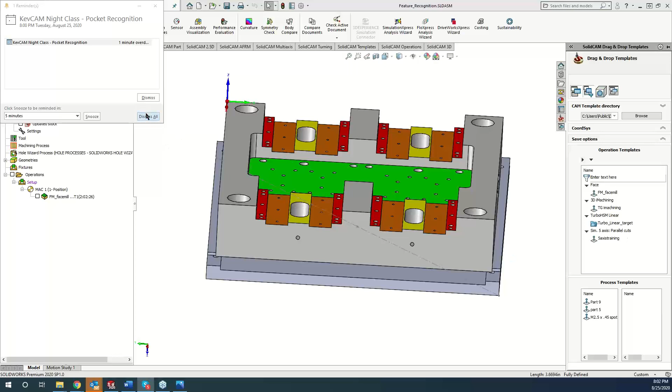But with that being said, we'll get the ball rolling tonight with pocket recognition. Pocket recognition is extremely useful and can be overlooked from time to time, but it's very powerful in what it can do.

Basically, it will look at your entire part, and as long as it sees pockets or open pockets like we're looking at right here, it will go through and it's basically hitting the easy button for machining. So to find that, you can go to your SolidCAM 2.5D tab and click on pocket recognition.

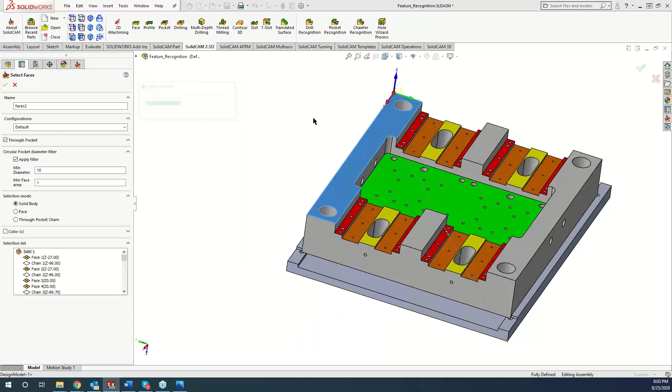Basically it's all based off of your model. So in here, if I go to grab new geometry, all I really need to do is click on the model, and you can see it's going through and parsing out the model right now. What it's doing is going through and finding every single possible pocket that there is.

So right now you can see, let's get a straight-down shot here, it's doing all these surfaces that are pink, as well as these holes, and these smaller holes. Well, in there we can actually sort it out.

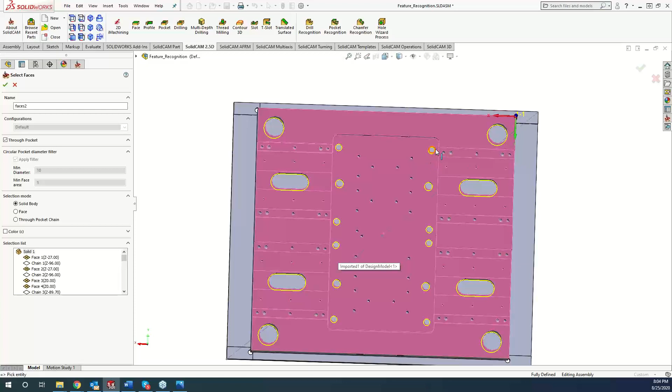Obviously, for doing these drill holes, it's probably not the ideal thing, so we can filter those out. Let me go through and unselect all this here. And now what I can do is tell it I want to apply a minimum diameter filter.

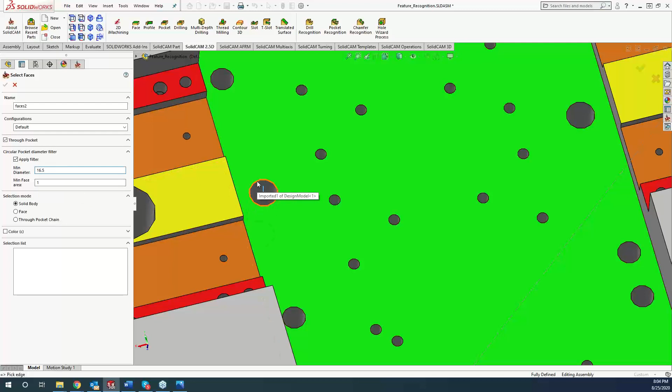So right now it's set, and sorry everyone, this is in metric. I can tell it I do not want it to do anything below 16.5. If you see how I did that, all I did was get my cursor in here and click on this diameter, and it will auto-populate for us.

So now, if we go through, it should not pick up those holes for us anymore. So now you can see all those holes that were in there are no longer there.

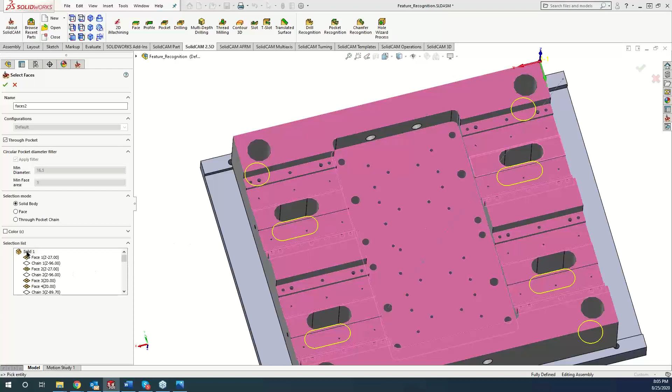Now you guys can also come through into your selection list right here, and cherry pick stuff out that maybe you don't want in there. As I click on it, you'll see that it's highlighted in yellow, and it's kind of tough on this one, but there we go, we can get a side view so you can see which one it is.

Another cool way of going about selecting your pockets is by colors. So you can see on this part right here, I can do it by color region. Let's just start fresh here.

So what I want to do is hit the color checkbox. Now I can do pick from model, and maybe I want to do all the orange faces. So I can click on the orange faces, and you can see that... Greg, what are these called? Pigment colors?

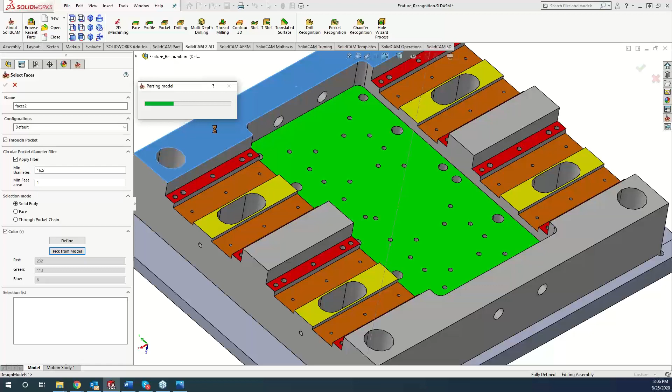So once I have those colors in there, I can click on the model, and what it's going to do is it's only going to look at those faces that are relative to those colors. So now you can see it has picked up all those orange faces. I can do this with any color, whether I'm looking for the green or the yellow. That's another way of going through and filtering out everything through the field there.

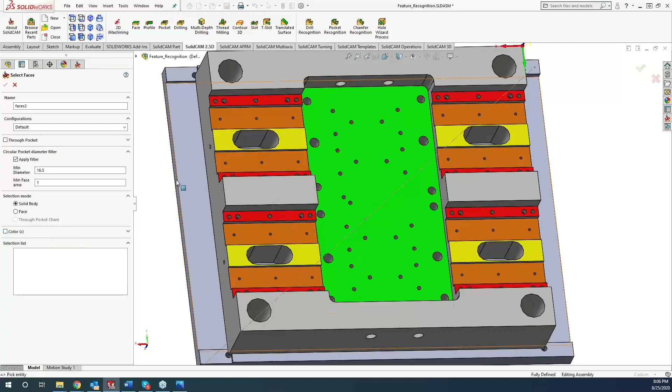So let's go ahead and unselect this. Now, maybe I want to do the entire part, but I don't want it to do any of the holes or through pockets. So what I can do is come over here, uncheck the through pockets, and turn off the color, and I can do it by solid body or faces. Click on there, and now we're filtering out those small holes as well as any through pockets.

So it's a real nice feature. If you have a part that has a lot of pockets along with a lot of holes, this is a great way to go through and machine out your part.

So now I'm happy with what we got. We're going to be machining off our entire face there. So I can go ahead and hit the green check mark there.

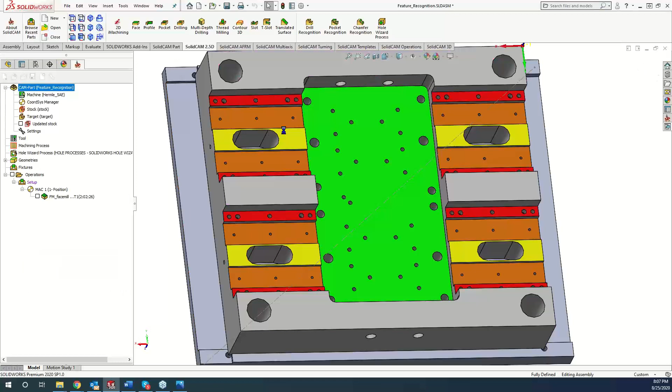And now I can come in, oh, let me just go a little bit deeper in here. If I want to edit that geometry, I can click the modify button, and maybe I want to divide it by steps. Do I want to ignore floor fillets? I can do fillet by one profile cut.

Exclude the top face. So if we're machining up that top face, maybe I just want to do it with a face mill versus a pocketing operation. You do have the option right there.

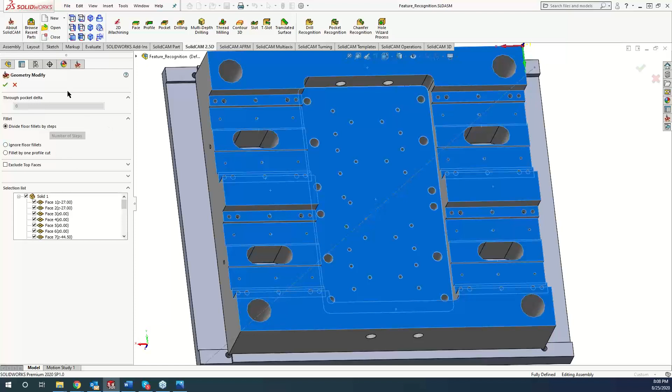Now you'll see right here, my through pocket is grayed out, and we'll come back to that with the through pocket ones shortly here. So now I have my geometry that was basically automatically picked. Any modifications I want to make to that.

I can also turn on my fixture protection. So if we are going to be going through the part into a fixture, I can tell it to go down up to a certain distance. We can also do rest machining in there.

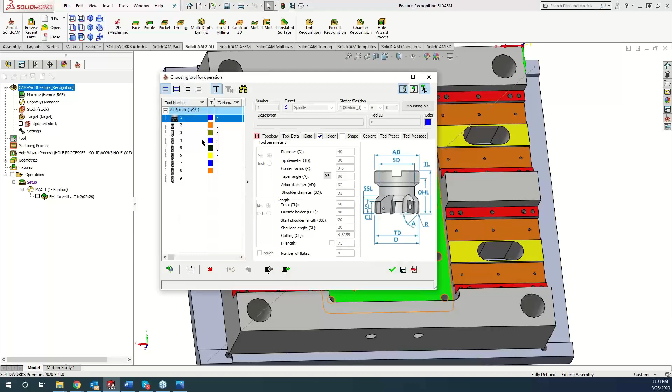Now, grabbing our tool. What do we have in here? We got a 20, that will work. And our levels. So right here is basically like a pocketing operation.

Upper level, now it's automatically going to pick the lowest spot on there. If you want to override that, you can just hit the little checkbox and that will override that. But since it's all based off of the pocket faces, it's going to find out the deepest spot.

Now, if I want, I can do step downs right here. So right now we're telling it to do 10 millimeter step downs. A lot of times I get the question asked, what is the adaptive step down? So basically, let's see, this wall is 5 millimeters.

So right now, as it sits, if we come in here and pocket this out, we're telling it that we want to do a max step down of 10, but sometimes it may be 11 thou, and there might be that 1 thou left over. If we turn on the adaptive step down, it will automatically insert additional steps in there to get that floor cleaned up for you.

So we can definitely turn that on. Like I said, it's basically looking at how much do you want to take per pass.

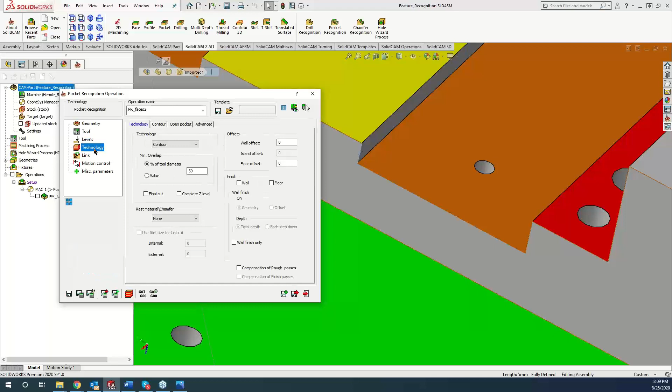If we go to technology, kind of like what we covered a few weeks ago, looking at just a pocket operation, it's the exact same screen as what we've seen before. So do we want to do a contour? Do we want to do a hatch? Do we want to do a hatch with a finish?

As well as how much do we want as overlap? So we can do percentage of tool. Right now we're telling it 50% of the tool, or you can set it up as a physical number in there. Are we doing rest machining?

Do we want to leave material on the wall and the floor to do a finish pass? If we are leaving material on there, do we want to do that finish right here? We do have the option just to finish the walls only. So maybe on this particular part, let's say we have a high tolerance for all these walls right here.

So what we can do is come in here and do a 5 thou wall offset. What I want to do is use this tool as a rougher, and then come back with a finishing tool and clean that up. So I'll show you guys how to do that also.

Inner contour, do we want to start from the inside or do we want to start from the outside? Corners, we can turn on our corners like we did in the pocket. If we can put a fillet in there, we can do loops as well as doing sharp. Do we want to climb cut, conventional cut, and then a couple other options right here.

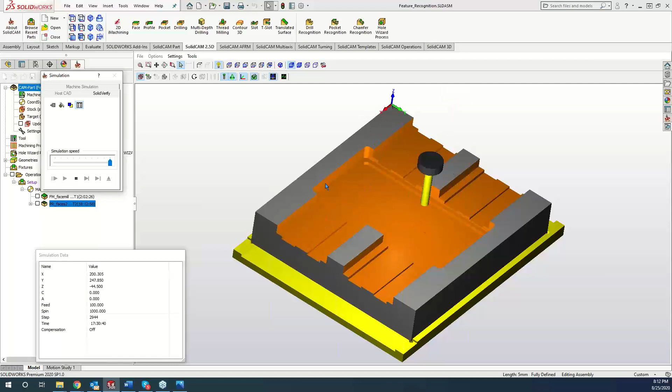Let's go ahead and simulate this through. So you can see, it starts from the center and works its way out. We'll try to get this to play through for you guys as fast as possible here. And now we go in there, we are good to go. So nothing needs to be cleaned up in there.

Actually, no, we should have - if we go back to my technology, we should have a wall offset. Oh, I forgot this is a metric part. We'll do a wall offset of 1 millimeter. Save and calculate, simulate this now.

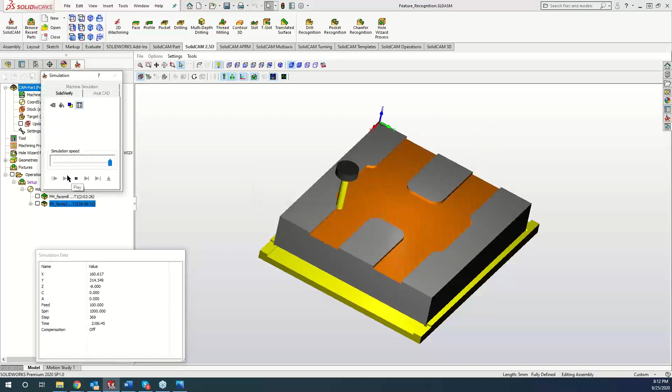There we go. And we can do our stock target comparison. And now we can see that we still have that material on the wall to finish up in there. So easy enough, I'll hop out of here. And I'm happy with the way this looks. So like I said, I want to use a different tool to finish up those walls for that good surface finish. So we still have that 1 millimeter there.

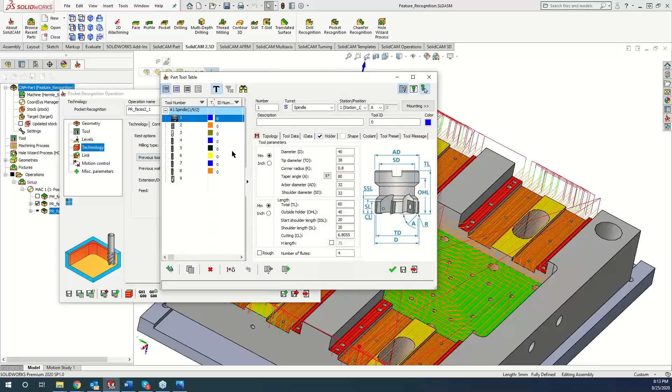So what I can do is do save and copy. And I can tell it that I want to finish the wall, and we'll put a 0 in there. I want to finish the wall only, and I can also turn on my rest material. Previous tool diameter is R20.

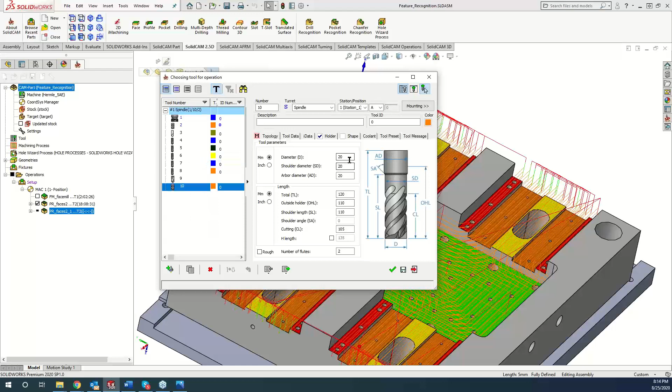And I'm just going to come in here and still use that same end mill - even though I would swap it out normally. So let's go to tool, select. Guess I'll have to make a copy here. Copy that tool, and we'll just say it's a 10 millimeter.

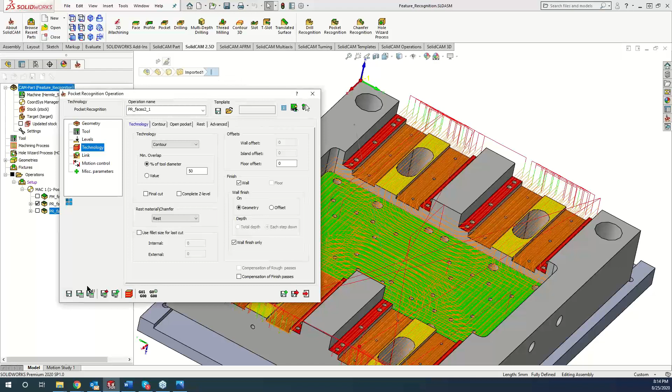It's not liking something I'm doing in here. There we go. Nope, still not liking anything in here.

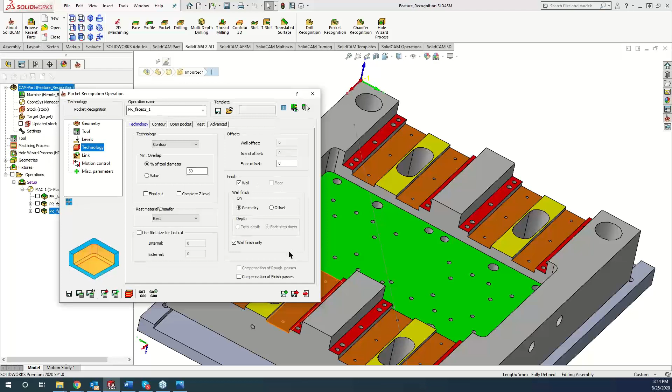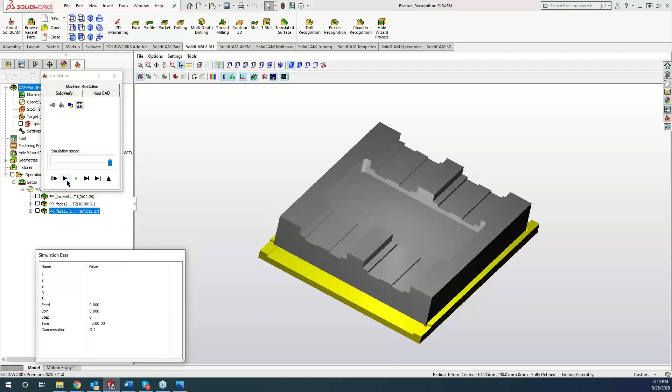I want to finish the wall only here. There we go. So technically there's no rest material there, because the end mill I was using was a 20 millimeter and we have a 10 millimeter radius. So I was trying to tell it to clean up material that was already gone. But now, if I'm looking for that really good finish in here, I told it just to finish the walls with that tool, doing that same step down. And it's not recutting any of the previous material, so all it's focusing on is cleaning up those walls. So now if I come in here, we can see that we have all the material gone from all these walls right here. Okay.

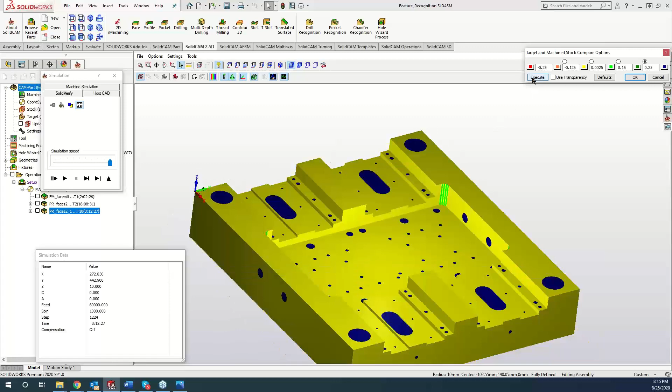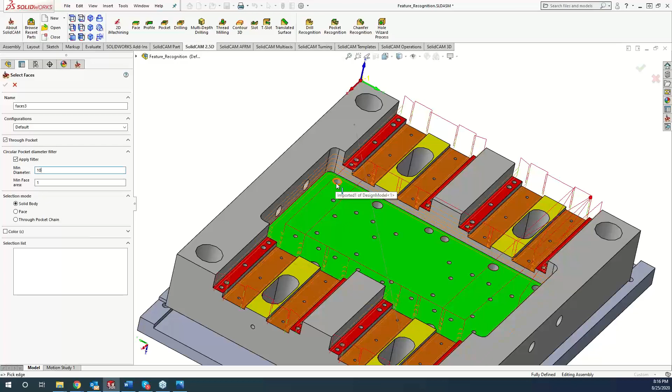Now, like what I was telling you guys before, with those through holes in here - let's go ahead and grab new geometry here. I'm gonna tell it to grab the through pockets this time. And oh, I forgot to filter. Darn it, sorry guys, unselect all. I forgot to filter out my hole here. This one, I thought was 13.5.

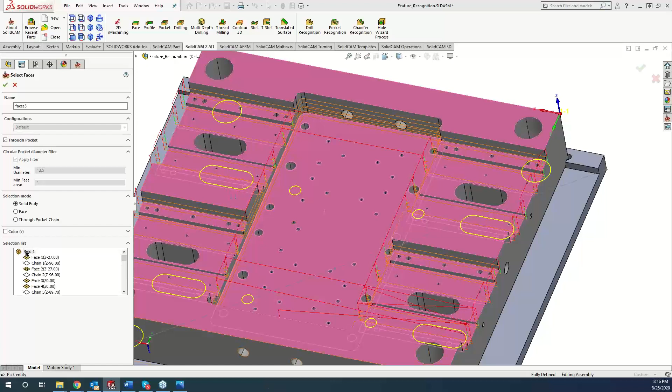Nope, looks like that's it. Going through and looking at the entire part file here. Oh, still got my holes in there, grabbed the wrong one. Sorry guys, I keep grabbing the wrong chain here. I'm gonna filter out this one. There we go. All right, now we have everything that we're looking for there, as well as our through pockets.

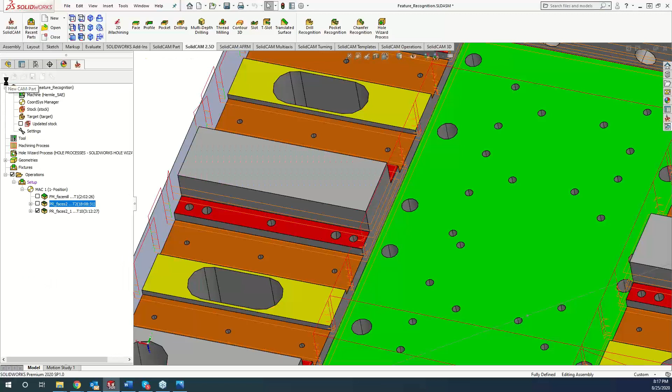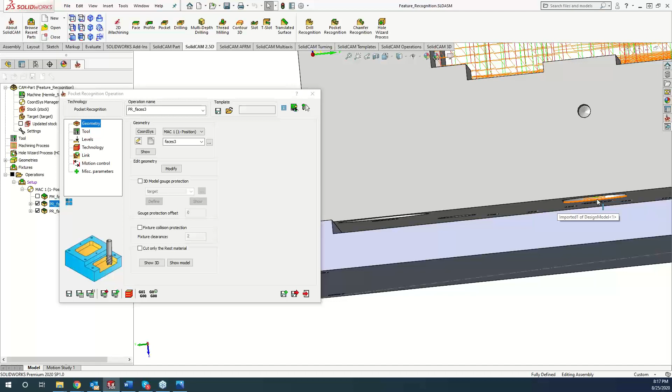Now, the one thing I want to show here is if I do save and calculate on this - zoom out here and we'll get it rotated around. If I go underneath my fixture, I can see that that toolpath is going right down to the bottom here, but it's not going past. So if I want, I can tell the operation that - hang on one second here.

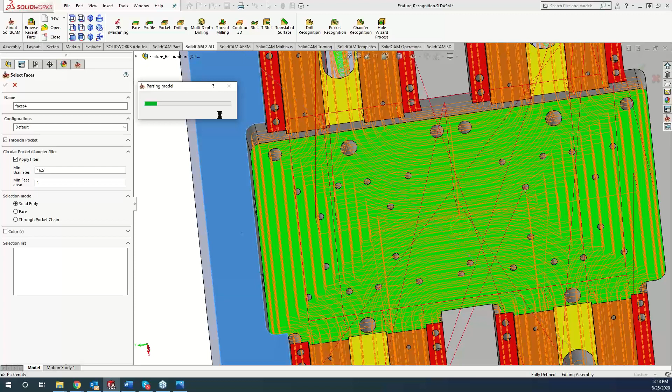Something is - we're having a SolidCAM failure going on here. Got our part. Okay, got our through pockets. Now, go to modify.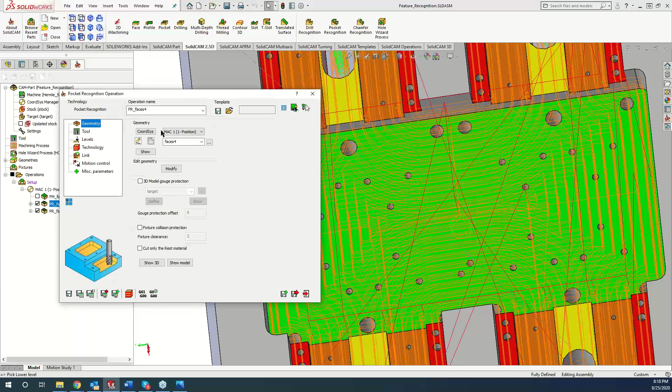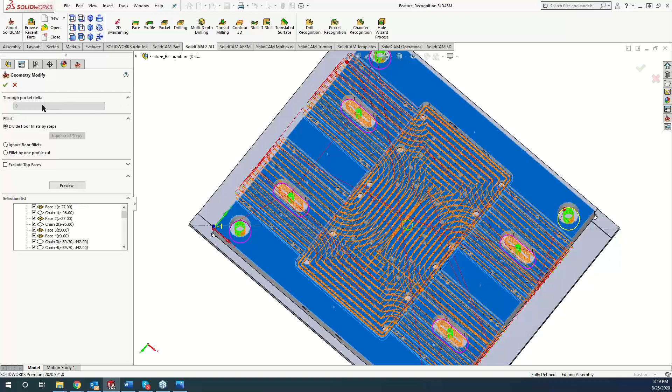Okay, I just did this right before we started the class. The through pocket, we should be able to come in here and type a negative or additional delta on those through pockets. So we can come in there and not do an additional across there. But I'll show you guys that in the next part too.

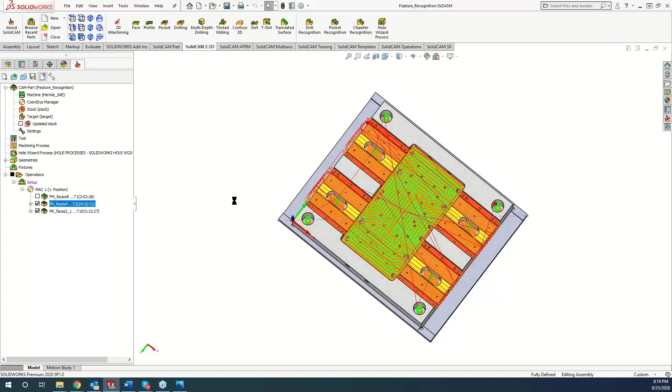But okay, any questions on this part file right here or on pocket recognition so far? Okay, I don't see anything coming through here. So let's hop out of this part file and go to our next one here.

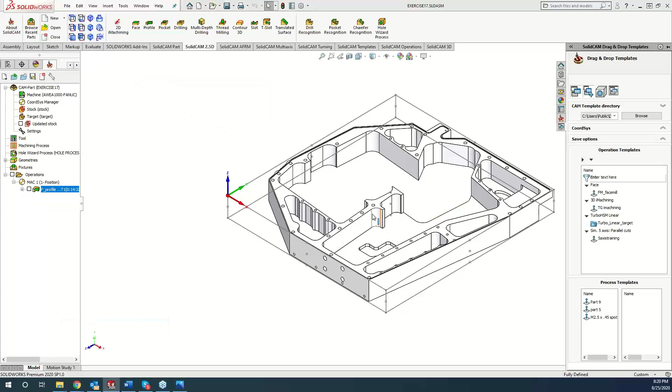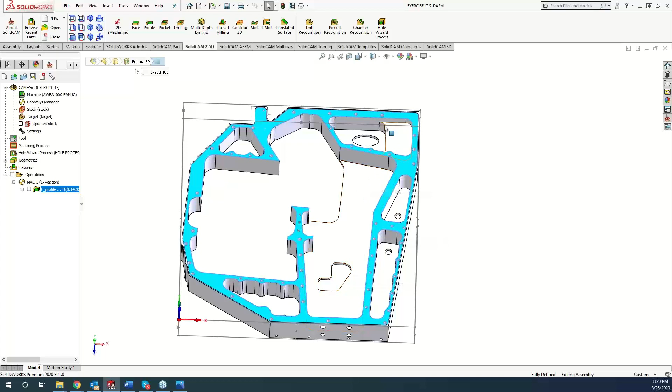Now, one thing I did forget to mention with pocket recognition is it does not matter on the depths. So all that other part, all those were at different depths. Same thing with this one, we have this space right here that is higher than this space. These are all different, plus we have through pocket, plus we also have this entire top right here. So this can be done in pocketing as well, but it definitely takes a lot more chaining to do that, where what it can do is come in here and tell it I want to pocket out everything using my cutter.

So we can go ahead and do our pocket recognition again. Grab our geometry. And I want to filter out that hole right there, which is 12.7 millimeters. So basically I'm telling it that anything that is 12.7 millimeters or smaller, it will not pick up. So it's going through the model and finding all the pocketing.

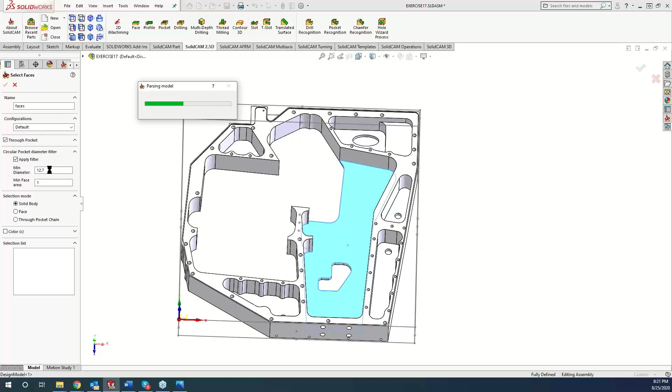Okay, so now you guys can see everything in there, but the one thing is with the open pockets, if it's over a certain size, it's not going to grab it. So what I can do is come over now and do the through pocket chain, and I can chain that pocket, and so it will grab it for us right there. So if the open pocket, or the through pocket, is larger - I don't know the exact number - but if it does not grab it, you can definitely come through and do that through pocket chain just like it is right there. Okay, so we're happy with that. We'll go ahead and accept that.

And now I can go into my Geometry Modify. And like I said, with those through pockets, I would like to go an additional maybe 5 millimeters, do a negative 5 millimeters past. So now you can see I got the minus sign with the arrow going down. So we're telling it to do an additional 5 millimeters past on those through pockets.

And my computer's slowing on me here. Jacob, you're bad luck to have you in here. Usually it goes through nice and smooth. That's definitely, we can definitely blame me. It's definitely my shoddy internet down here in Kansas.

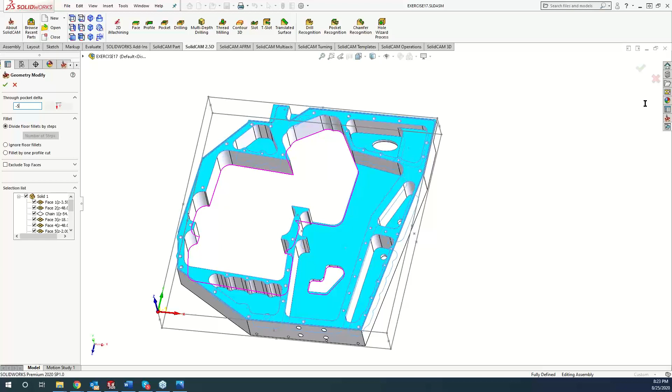All right, so come on here. What I'm going to do is just reselect this here. So we want to filter out that hole diameter. Click on our model.

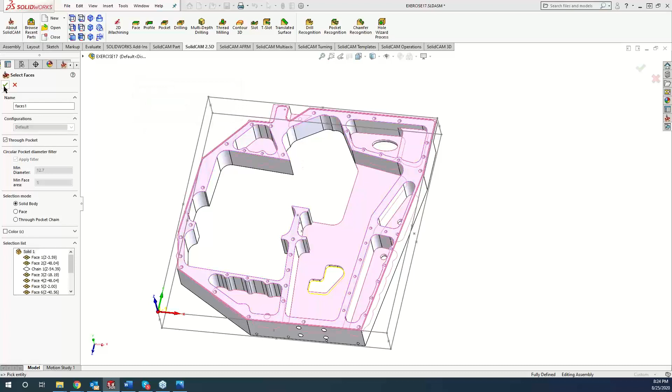All right, and then we got to grab that through pocket chain again.

Now, to Jacob's point, regardless of color blindness, there's always the pick from model feature as well. So if there's something showing up that you don't recognize as a particular color, you can click on that model face using the define feature, and it will grab those values for you and select everything that's within that color.

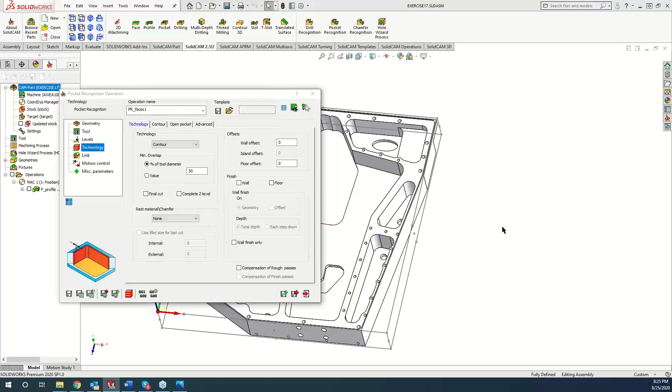Absolutely. All right, so kind of the same thing as before, we are going to do rough and finish it all out with what we have right here. We can turn on our wall finish, but since we already have a wall offset of 0, we don't need to, but maybe on that last pass we'd just like it to take maybe 5 thou. So right now what I'm telling it is it's going to leave 5 thou on the wall to do a finish pass to clean up that 5 thou that's left over.

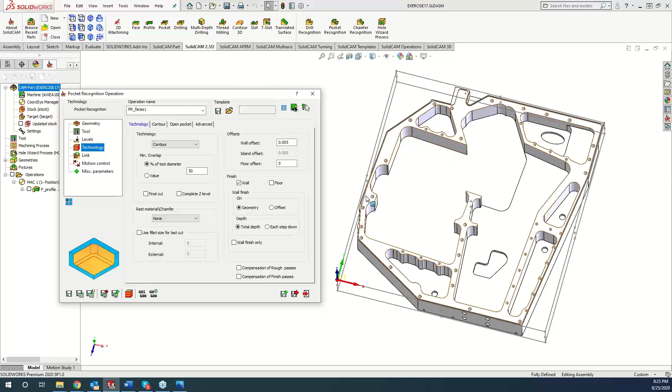And we can turn on our compensation for our rough passes as well as our finish passes if you guys would like that. So we can save and calculate here, and let's go ahead and see what we have. We'll go ahead and go to our SolidVerify here.

So there's that real thin top layer that was in there. And now, like I said, we are doing those 10 millimeter step downs in there.

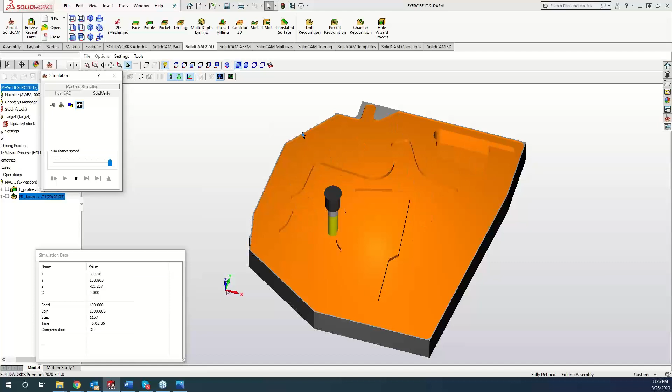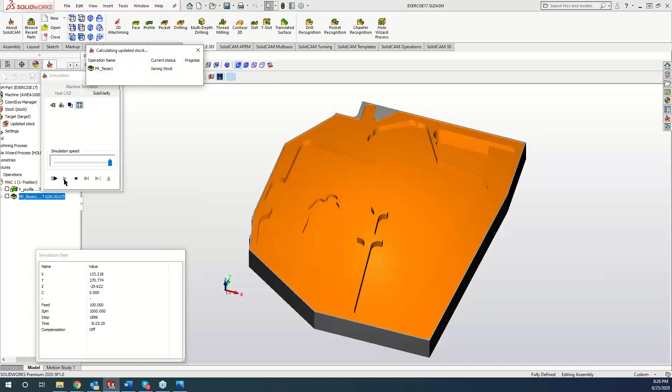And if you guys are having a lot of these pockets, and you can kind of see right now the simulation speed's going a little bit slow, what you guys can do is come into your accuracy and change that. So if I made it 0.01 millimeters versus, let me pause this and reload it again, now you can see it's doing it much faster if I loosen up that accuracy. Now that accuracy does not have anything to do with the way your G code is or the way it's going to be on the machine, it is just visual only for what you guys are seeing in here.

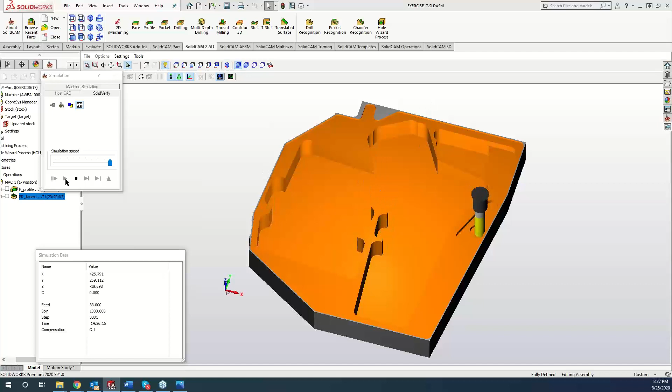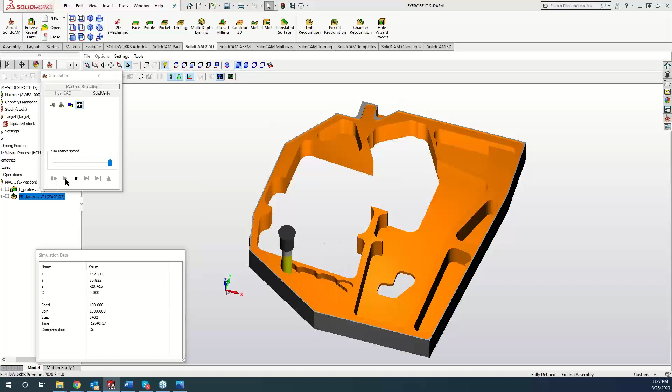Getting those side pockets there. So you can see how much toolpath is actually in here just by doing that one operation. So like I said, if you guys have a part that has a lot of pockets, this is a very helpful feature to do.

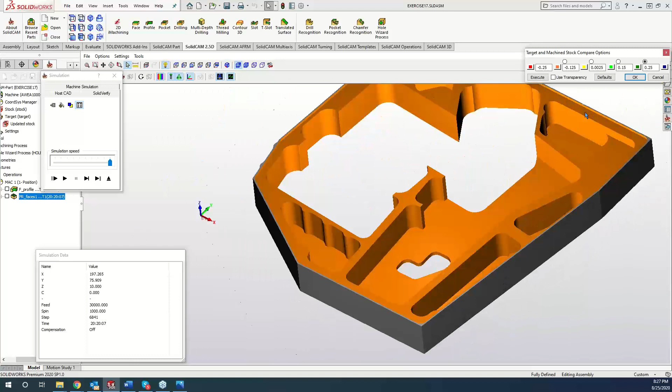Okay, so now we got that done. Let's do our stock target comparison and see if we have any material left. And I do see right here we still have some leftover material, as well as it looks like there's some blue over here. We still have this pocket that never got cleared out just because that 20 millimeter tool was too big to fit in there.

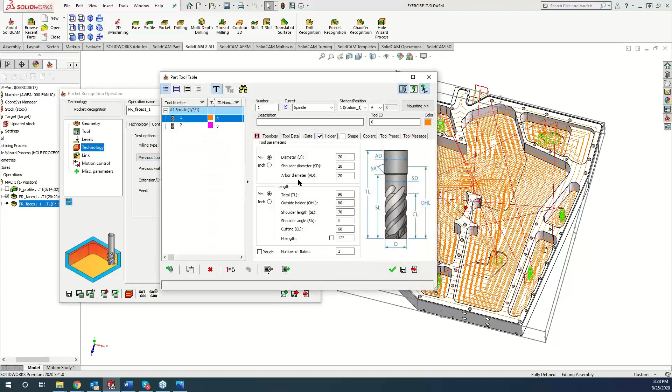So what we can do is, like I said before, we can do save and copy, and we will turn it to rest. Our previous tool diameter, if you don't remember, you can always just click the previous tool diameter number and grab the tool out of the list. Now do save and calculate. Oh, I forgot to change my tool to something smaller, so we'll switch it over to a 10 millimeter. Now save and calculate.

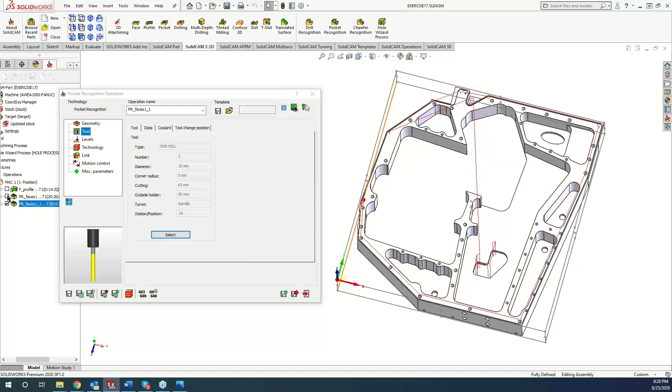And now you can see the toolpath is just coming in there and cleaning up wherever that 20 millimeter could not get into. So now if we go ahead and play this through, you can see it came in there and cleaned up those corners right there, as well as all these little corners up here and here.

And now we get our stock target comparison. We can see that we are right on that yellow, light green area, so we know that we're good in there.

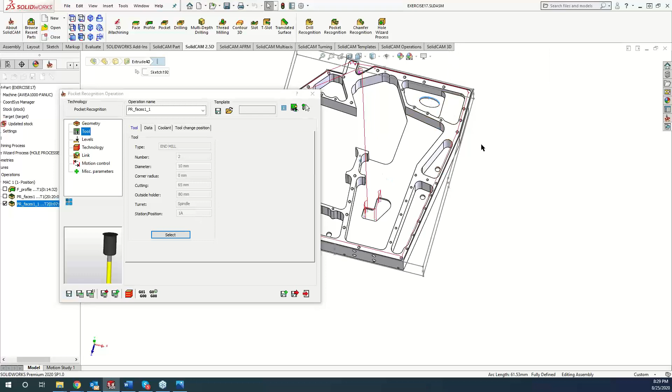Now, we did not hit this pocket again over here. Must be, let me hop out of here real quick. And I really have no way to measure. Yeah, it's giving me an arc length.

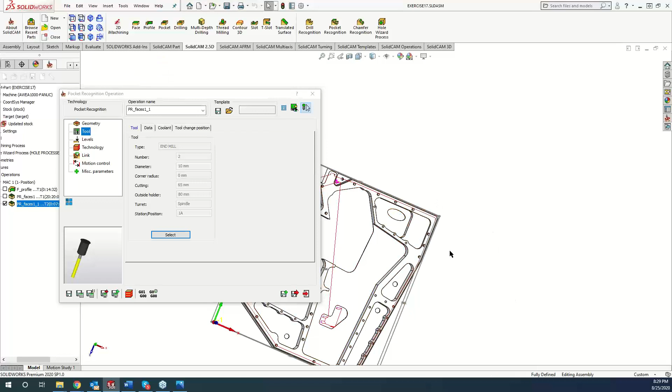So one cool thing you guys can do is turn on your visual tool. And if I come out, boy, I'm just not winning today. Can't get my tool to pop out for us.

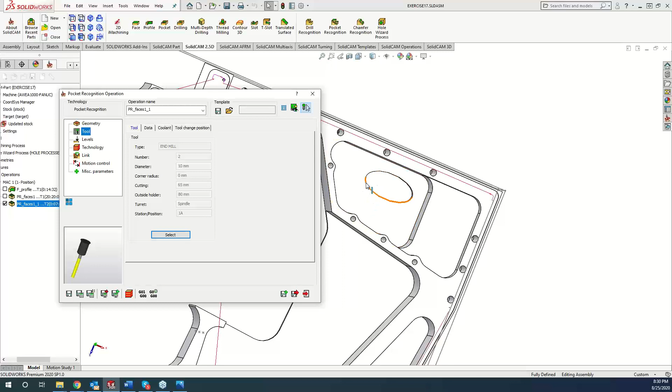Nope, I just can't get that thing to show it today. So what I'm guessing is happening is that 10 millimeter tool is still too big to fit in there. The only other thing I can think of is if we come in here, it's saying that I used that same chain. Okay, so what happened is it didn't grab that chain for us. So that's one area, if we come back and grab new geometry here.

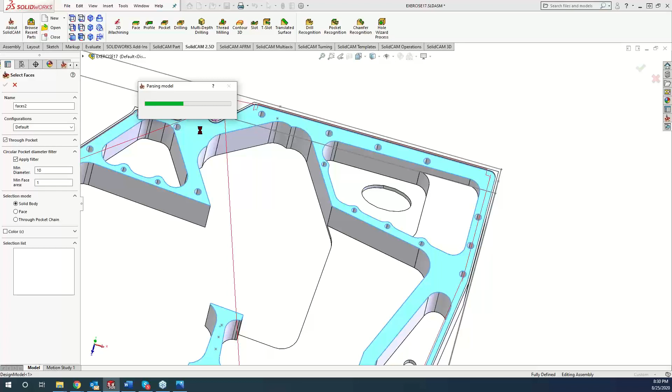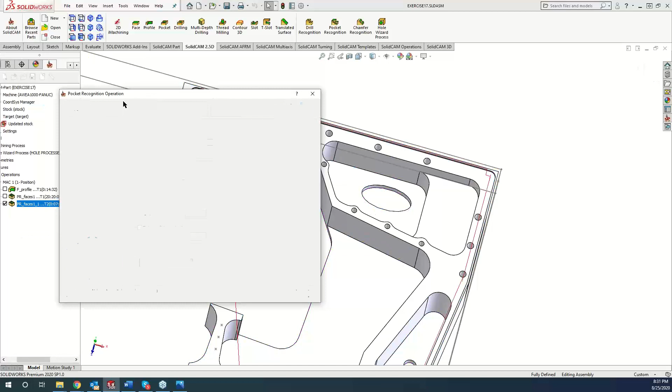And now we can see that tool's coming in there. So what I'll do is I'll come back to this one up here, and I'll switch this from faces 1 to faces 2. So now let's go ahead and play this all the way through now.

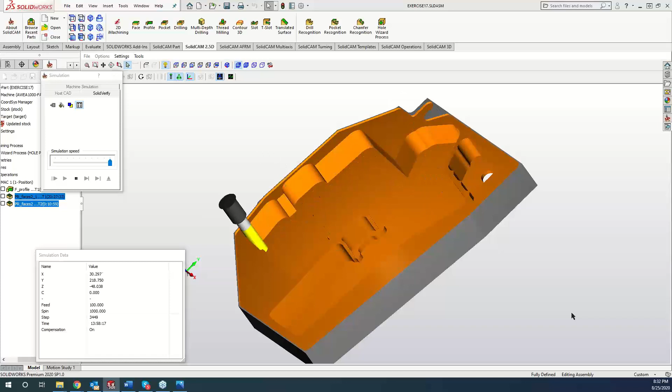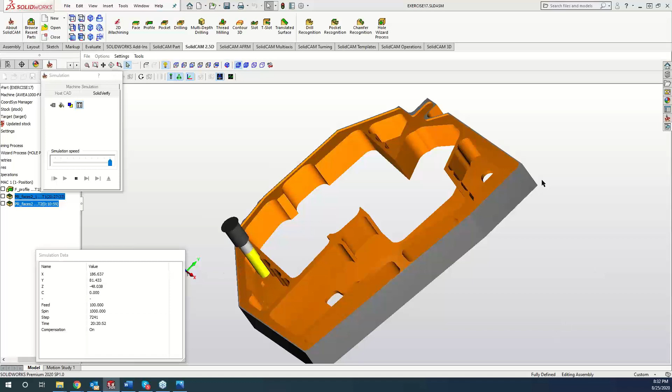Kevin, while this is playing through, what packages can people expect to find this functionality in? Good question. To get this functionality, you'll need 2D Pro or higher. If you're getting 2D Standard, you won't get any of the recognition toolpaths you're seeing up top right here, as well as iMachining. So as long as you have 2D Pro or higher, you'll get the additional bells and whistles like chamfer recognition, hole wizard recognition, pocket recognition, and drill recognition.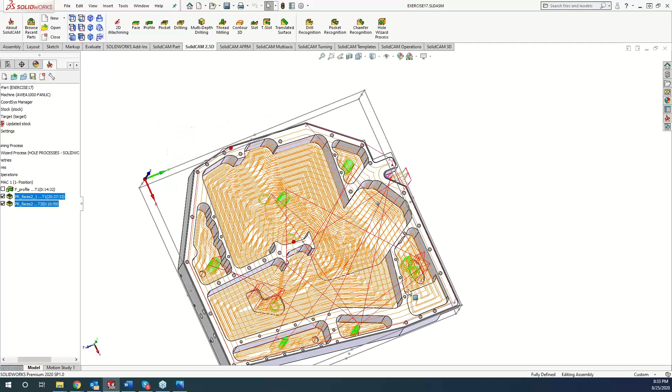Greg, am I missing anything we should be showing these guys? No, I think that's pretty good for pocket recognition. I guess it should be said that there is similar functionality to what you see in pocket recognition in some of the higher end packages. Yes, things like 3D iMachining or the HSM horizontal surfaces, which are other powerful tools that can be used in conjunction with pocket recognition or in place of it.

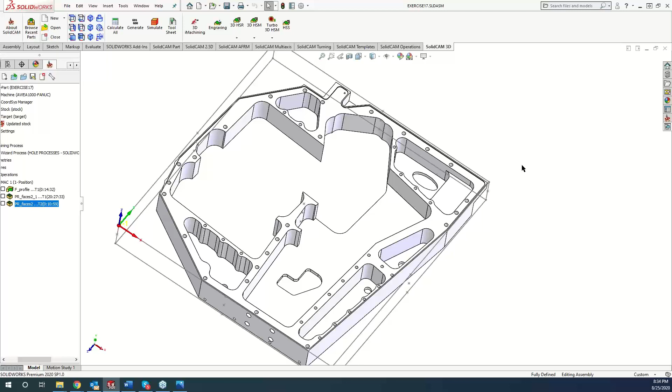And I know you're going to cover those at a later date. Yeah, but I guess just to highlight that there are multiple ways we can use feature-based geometry and toolpath to remove this material.

A great point. So with what Greg is saying, we can come in here and use horizontal machining in HSM. We can also use prismatic part machining, which works very similar to what you're doing here, but along with these more advanced toolpaths, you'll have more options - maybe sectioning off certain areas, a slower feed rate in some areas, stuff like that. You'll get more advanced options for that, and like Greg said, we'll be covering those in a later class.

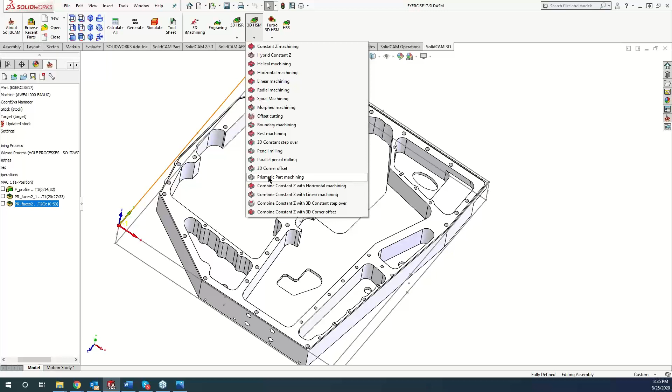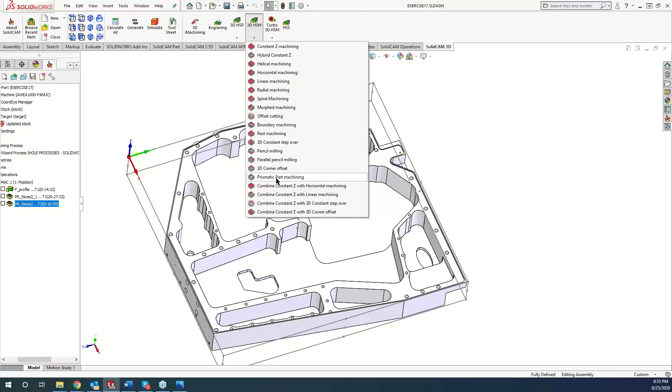To be honest, if I had the 3D package here, I'd probably tackle this with 3D iMachining first, since it finds all my material for me, so I don't have to click on any faces. Plus I don't have to figure out a feed rate or spindle RPM, which is nice. Then I can come back and do, like Greg was saying, the HSM prismatic or prismatic part machining to finish up those walls and floors for a really nice looking finish. We'll be covering that at a later date too. But I think what Greg is getting at is there's more than one way to skin a cat, as they say. Oh, absolutely, tons of flexibility here.

Any questions from anyone before we wrap this up for tonight? Well, I think we wowed them or put them to sleep, one of the two. Don't be shy to send them in, I'm pretty good at reading, guys, I'll gladly read it off here. Yeah, I don't see anything coming through, so I guess we'll wrap it up with that.

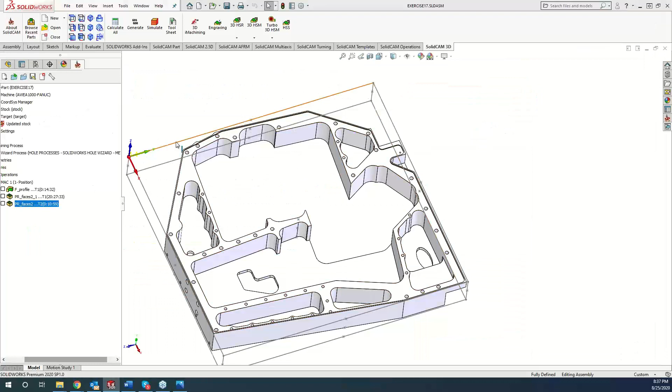He's asking if pocket recognition works on cylindrical models for fourth axis toolpath. So when it comes to a fourth axis toolpath, as well as cylinders and stuff like that, instead of doing a pocket recognition that way, what we would want to do is use what's called a wrap, because it is on a fourth axis. And inside of the pocket recognition, we don't have that option to turn on wrap.

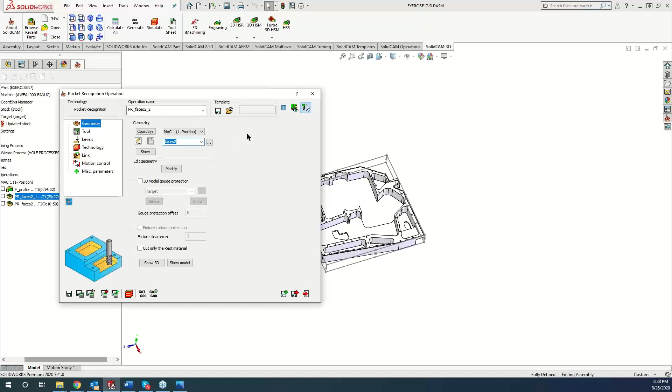So you can see right here when I go to grab my geometry, I cannot tell it if it's on a wrap surface. Now, Greg, you may have to correct me if I'm wrong here, but we may be able to do something with the fourth axis right here, but it's not going to recognize the pockets just because it's not on a flat plane.

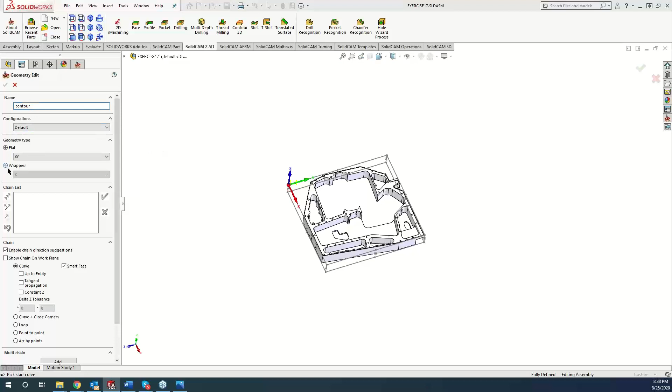So if you guys are looking to do pockets on a cylinder or round surface like that, I would definitely use just a regular pocketing operation or iMachining, because in there you will get... let's do it real quick. If I go into a pocket, go to grab new geometry, I would always want to turn on my wrapped function to let it know that it's wrapping around a cylinder.

So that's if you're selecting from the 3D model itself. Like Kevin's saying, pocket recognition isn't going to grab anything that has any variation in the Z level as defined by the coordinate system that you initially select.

So if you do have geometries that are like 2D geometries that you used to create a wrapped cut feature within SolidWorks, you could use those same geometries and use the fourth axis command that Kevin was specifying. And if you look at the pocketing night class from a few weeks ago, you can select all of that 2D geometry using the multi-chain, or bring up the geometry window again, Kevin.

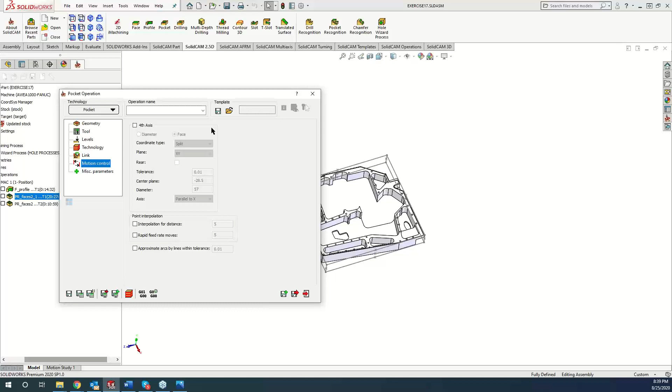The multi-chain. Yeah, multi-chain add, and then grabbing that entire sketch. And as long as that sketch had multiple chains that represented those wrapped pockets that were on a consistent diameter level for the depth of the pocket, then you would be able to grab all those chains.

And then apply the different options within the fourth axis toolpath under the motion control page, and specify that geometry that way for fourth axis toolpaths. Yep, absolutely. Great question, Ruben.

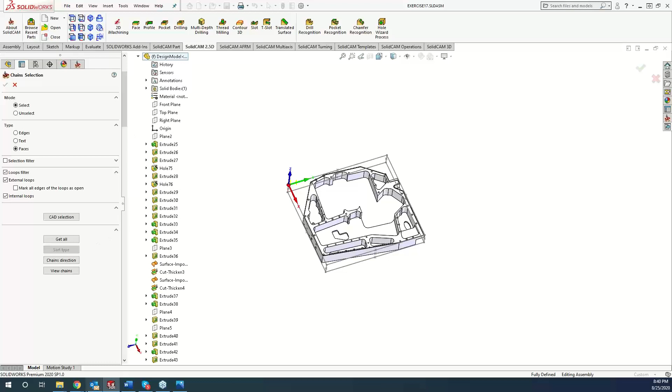But if you, I think we have one here. If we just type in... that feels like a Mark Pimentel SolidCAM live. That way we can put it on there and he can actually show it, so everybody has a good understanding of what's going on.